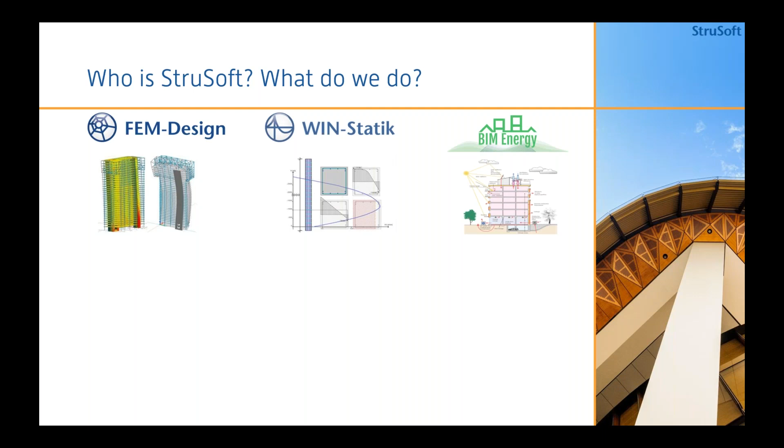And even before that, I would like to make a small introduction about Strusoft and who we are and what we do, even though today we will focus on FEM-Design.

We develop and distribute several software products: WIN-Statik for individual element calculation and design, including frames; BIM Energy for energy calculation and optimization in buildings; Impact Precast and Impact Reinforcement for factories which produce prefabricated concrete elements; and Prestress for pre-stressed concrete element calculation and design.

We are a leading distributor and software developer in Scandinavia for structural design software. You can see here a rendition of our users across Europe, Northern Africa, and a little bit of Asia. There are a lot of users in Scandinavia and the Nordic countries, where we are a leading software provider, and we also have users across Europe, in the UK, and around Central and Southern Europe.

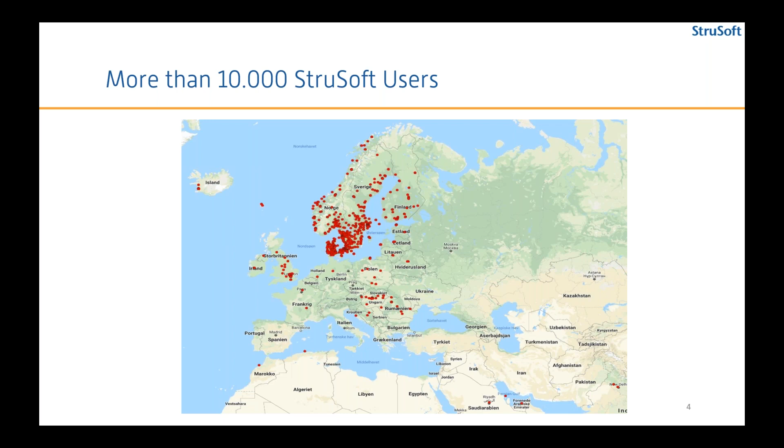We have offices around the world. Our headquarters is in Sweden, where we have 3 offices. We also have 3 offices in Denmark, our most recent office in Finland, and branches in Romania, Hungary, and in Asia, in the Philippines and India.

Let's talk a little bit about FEM-Design, our focus for today. FEM-Design is our 3D finite element method software for modeling, calculation, and design of structural elements. You can do a lot in FEM-Design.

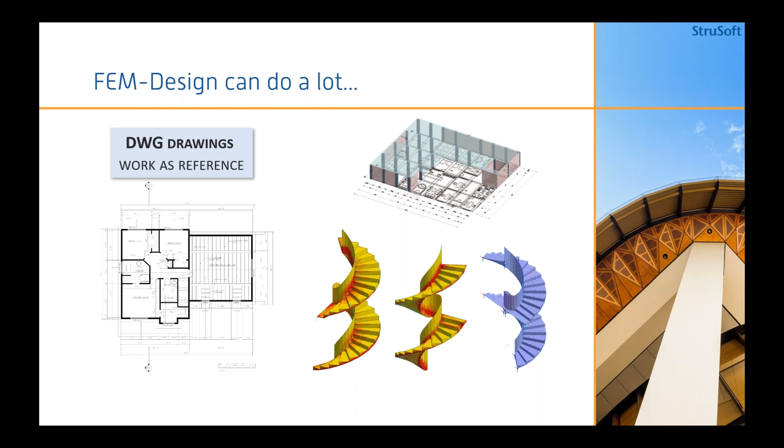I will present a few major topics today. You can model any type of shape really in FEM-Design. You can import DWG drawings and start building from the ground up. You can also import 3D drawings and start modeling as shells, and calculate stresses in those shells and deformations.

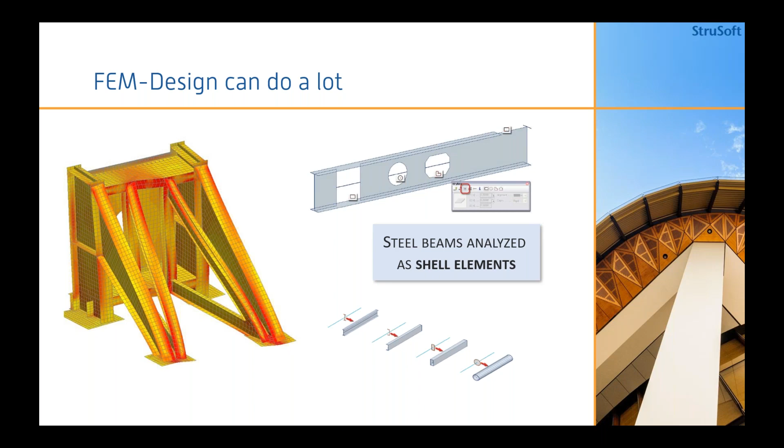As I said, you can basically model any type of shape and structure in FEM-Design and calculate the stresses in those shells.

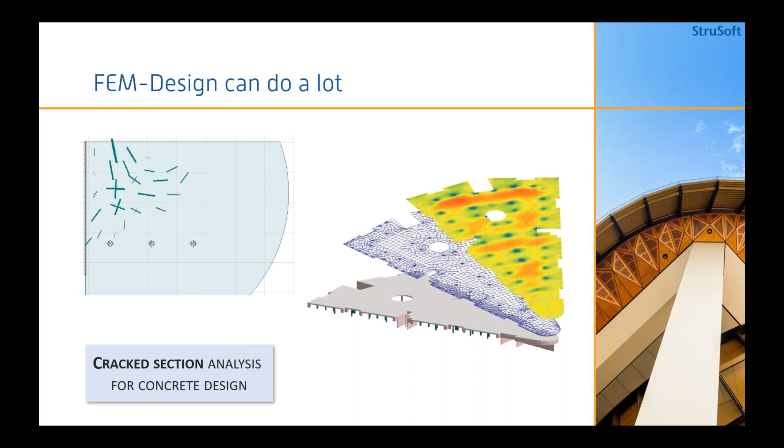A very powerful tool is the cracked section analysis for concrete design. You can calculate a concrete slab with reinforcement in it and study the long-term effects like cracks. You can perform a cracked section analysis and investigate the cracks in an iterative procedure. Once the crack is located, the stiffness is reduced, and then the loading continues until the next crack, and so on and so forth.

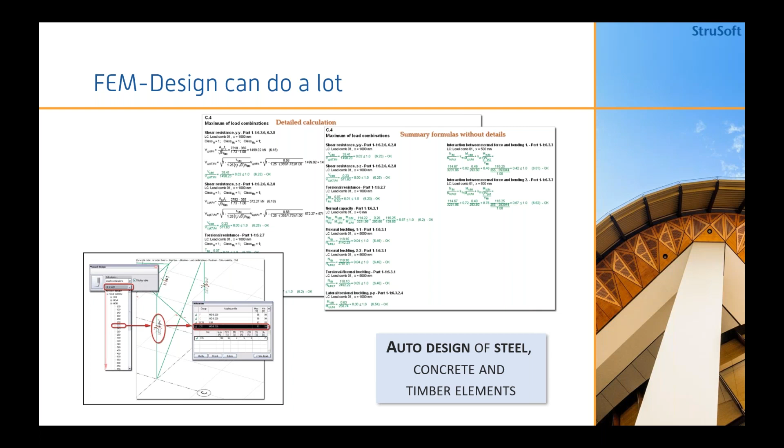FEM-Design has design modules. One of these is the steel design module. You can perform a detailed calculation and verification according to Eurocode on steel elements and get a detailed report with the calculations, ready to be printed and added to the documentation.

Concrete design allows for design of concrete beams and concrete slabs. You can also obtain a detailed report of the calculations and the reinforcement design in beams and slabs.

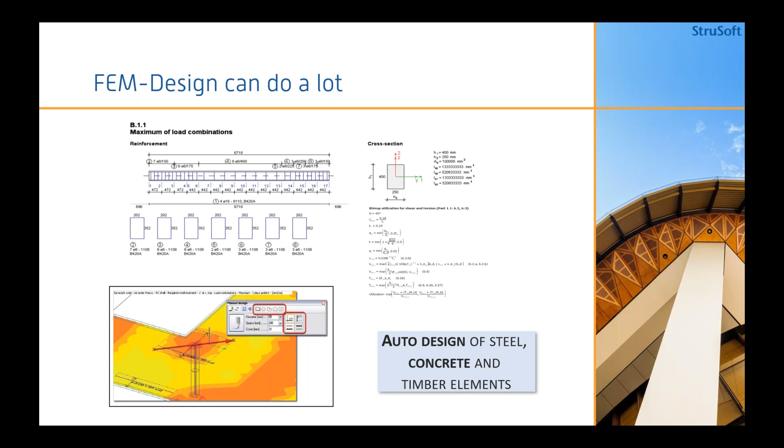And there is also a timber module, which we will actually talk about a bit more today. Similarly to concrete and steel, you can obtain a detailed calculation and verification and perform a design on your timber elements, including CLT panels. We will talk a little more about that in a second.

FEM-Design also includes a 3D soil module. This is an advanced 3D finite element model, and you can study the deformation and the forces in these 3D elements, which is a more accurate representation of the behavior of the soil, as opposed to a spring model and a bedding modulus. You get a much more realistic picture of the soil's behavior, and basically we can model starting from the soil, the infrastructure, and the superstructure all in one model. That is the power of this 3D soil module.

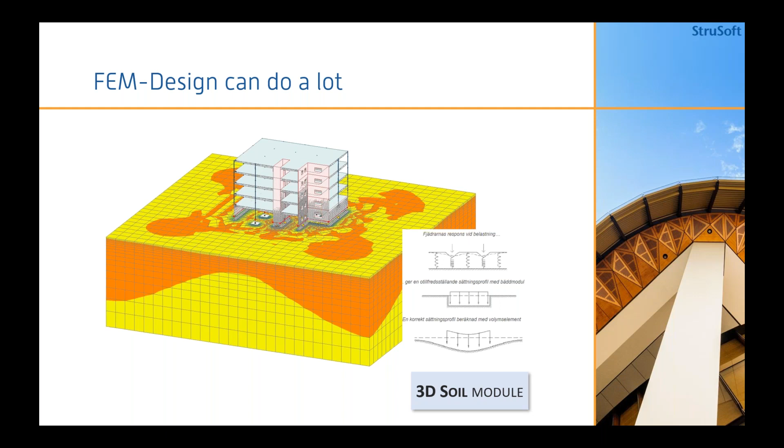I gave you an overview of what you can do in FEM-Design. Of course, there's a lot more, but right now let's jump into our main topic of today, which is the timber module. For that, I will hand over the presentation to my colleague, Stoyan.

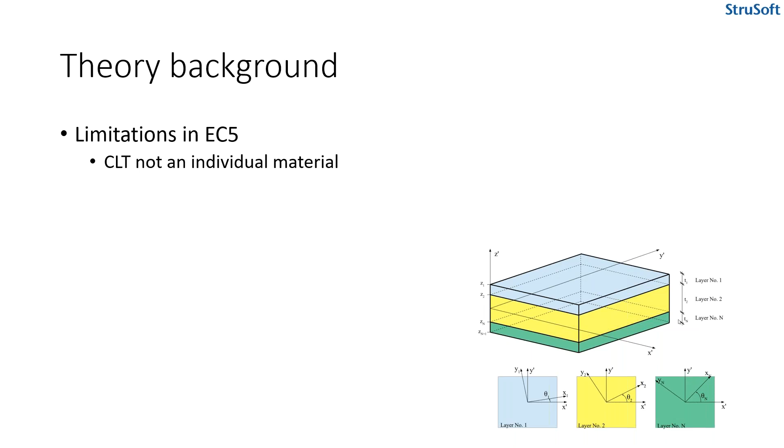So let's start with the theory. The reason we need to talk about theory is that there are some limitations in Eurocode 5. Mainly, CLT is not an individual material yet, so we need to take some other steps to calculate it. Also, Eurocode suggests beam theory, which would be too simplified for FEM Design, because we'd like to use arbitrary shapes, not only the beam shape element. There are some other methods available in some handbooks, but most of them are either too limited or too simplified to be used in FEM Design.

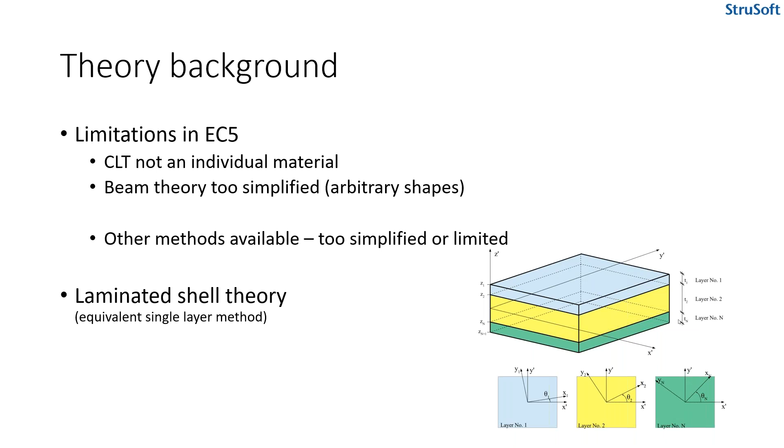So we need to figure out how to go around this problem and implement something new or different, and we chose the laminated shell theory. It's also called the equivalent single layer method in some literature, so if you see that name, it's the same thing. It's useful in general to check the deformations and stress distribution layer by layer in a composite shell, and that's exactly what CLT is, a composite element. The advantage of this method is that with slightly longer calculation time for the element stiffness matrix using the homogenization procedure, the same number of equations remain in the final structural equation system, regardless of the number of layers. So even with really strange shapes with thousands of layers, the final equation system for the whole structure will still have the same number of equations, which saves a little time in the end.

Another advantage is that we can model arbitrary geometry, as I said before. We can also take into consideration different boundary conditions. We can make the whole structure with shells and bar elements, because the degrees of freedom of the CLT are compatible with the other elements in FEM Design. So you can use everything in the same model—you don't have to break it down into a separate CLT model and then a beam and regular orthotropic plate model.

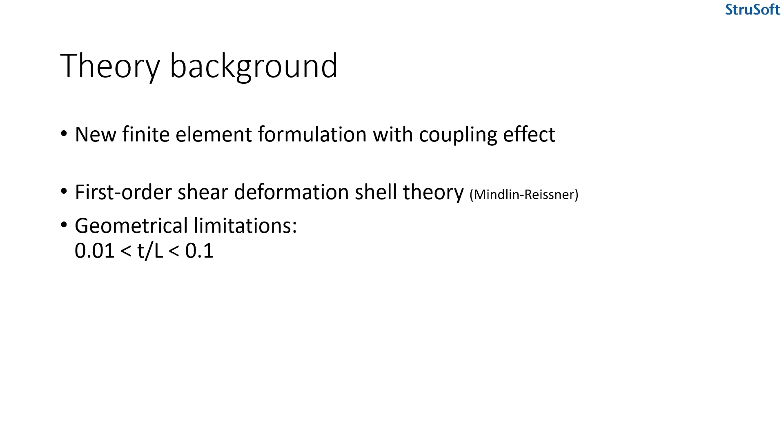Okay, let's move on. In CLT, it's mostly the rolling shear that we need to consider and keep in mind. Also, we should think about the geometrical limitations of the panels. We've suggested a geometrical limitation of 1 to 10% of the length of the element—so the thickness of the panel should be 1 to 10% of the length. This isn't a critical limit, more a good rule of thumb. Even if you're a little below or above, it's no problem, but try to aim in the middle.

This is the well-known formulation of the stiffness matrix, force vector, and strain vector. On the left side we have the force vector with the bending moments, normal forces, and shear forces. In the middle, we have the stiffness matrix with the bending stiffness, membrane stiffness, and shear stiffness. On the right-hand side, we have the strain vector with the curvatures, mid-plane strains, and shear strains.

But the special part of this formulation is that we've now included the B parts, which are the coupling effect parts. For the regular orthotropic plate, we don't have those parts, so they're zero. But for the CLT panel, we implemented this new formulation, so we need this coupling effect here—that's what makes the formulation special. The stiffness matrix itself is the same size as all the other elements, so as I said before, the laminated shells are totally compatible with other elements in FEM Design.

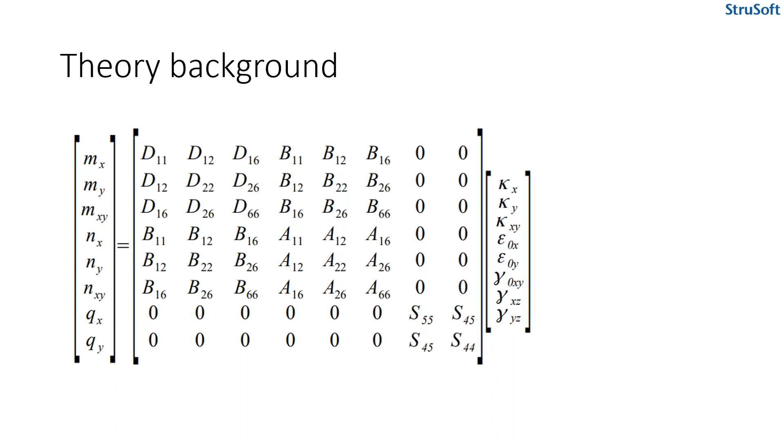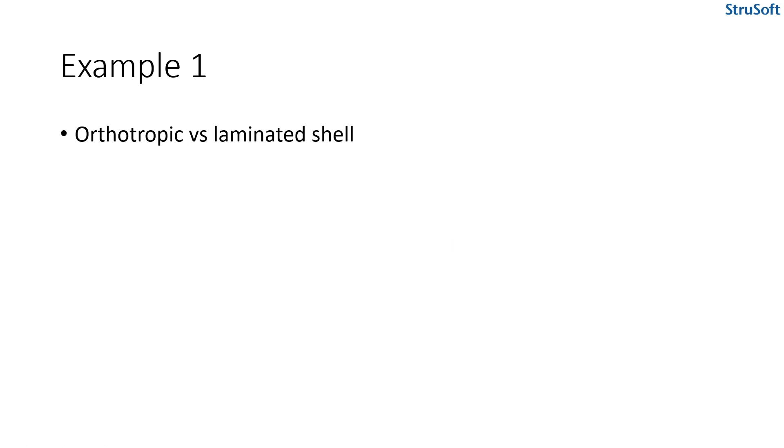Let's see the first example. It's orthotropic versus laminated shell, a little fight between those two. Let's see how they handle in FEM-design.

I have modeled two different files. This one is for the orthotropic plates. Let's see the parameters first, or properties first.

I just selected a random orthotropic shell. You can see from the drop-down list that it's orthotropic shell, just a random type. I actually made it myself to be more similar to the CLT panels regarding the stiffness.

For stiffness, we have a new button down there. You can see the stiffness of that element. You will see all the parts of the same stiffness matrix, so you will see the D part here. If I'm looking back at the slide, the D part, upper left-hand side, and also the A part of the membrane stiffness and the shear stiffness.

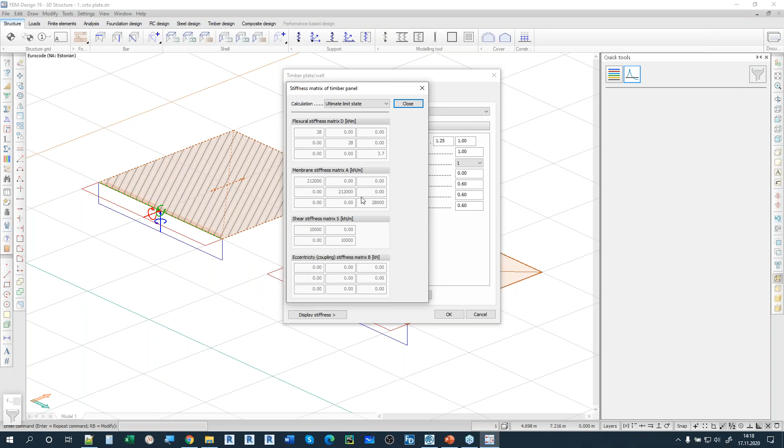And you can even see the B part, or the new coupling effect, but you can see it's all 0, because for the orthotropic shells, this must be 0. There is no coupling effect in orthotropic plates.

And if we load those plates with a force, in-plane force, then you can imagine what we get. Of course, we get in-plane deformation. It's quite usual and expected. Nothing special here.

I modeled two plates because they have the different grain direction, but it doesn't matter much in my scenario.

But if we are looking at CLT, let's open up the other one. Yep, the CLT plates. They are now cross-laminated timber, not orthotropic shell anymore. And again, I defined just a random one.

I will show the details later, but just for now, you can see the stiffness matrix as well with all the parts. But now you can see that the coupling part has actually some values in it, so it's not 0 anymore. So there must be some coupling effect going on.

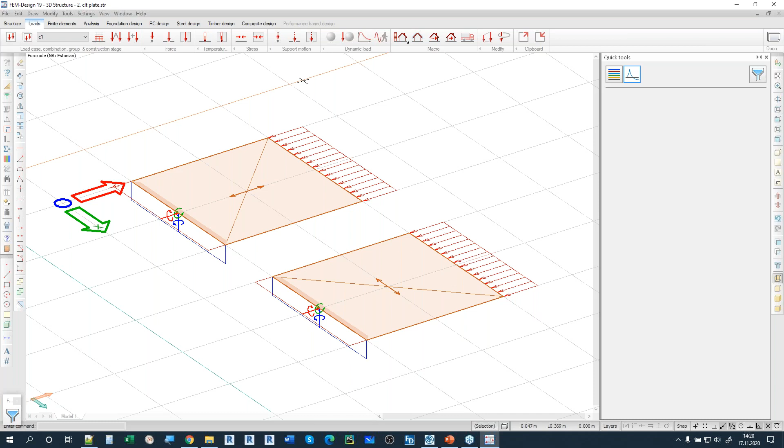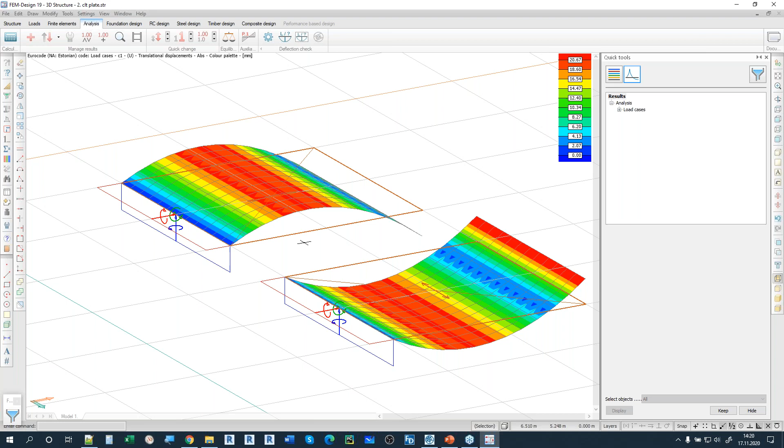Regarding the structure or the properties of the element, we can see what we have, what we can change. You either modify the existing ones or create new ones. I will just modify it just to show you.

We have this new dialog consisting of all the layers of the CLT. Right now I have this only 2-layer CLT, but you can add as much layers as you need. Just click on the empty space and you can select the material for that layer. So it's the regular Timber library that we have inside FEM-Design.

You can change the thickness, of course, for each layer. Let's say I want to make it really thick, the first layer, and the lower layer is still thin. If I hover over the picture with the mouse, I can see that in the upper part in the chart or in the graph or spreadsheet, it will highlight the line with the yellow color, so you can easily identify which layer it is that you are looking at right now.

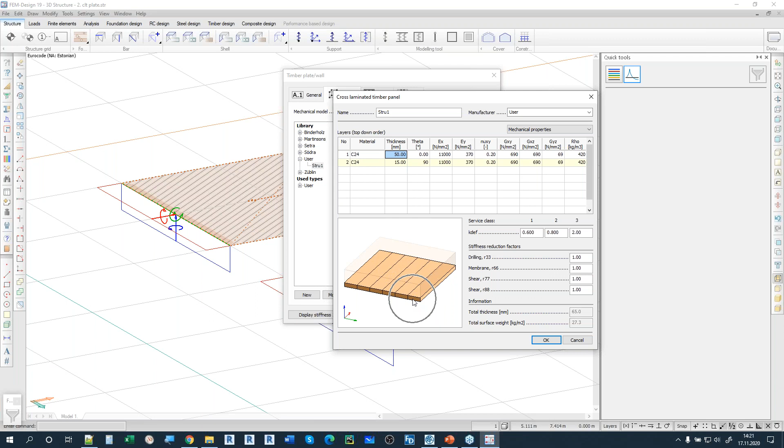And of course, you can change other parameters like the angle of the elements. So it's up to you what you want to use.

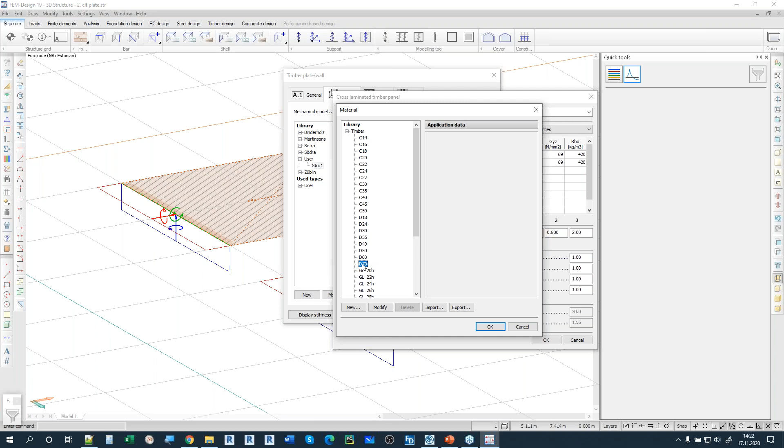And you can of course fill in all the values here as well, all the Young's modules and other parts. But if you're adding a new layer, I'm just randomly selecting something from the list, it will actually automatically fill it in for you. So it will take the same data that is in the database and just fill it in.

Of course, you can manually change it if you want to change something, like you can just modify that value and you're good to go. And deleting is just selecting the element and pressing the delete button. So it's really simple.

Also, you have the service class deformation factors here for each of the service classes. So you can change those if you like. I'm just going to show you what happens if I'm changing them. And you have stiffness reduction factors as well. Those are the factors that you get from the manufacturer, for example.

So if you are looking at the values here, the R33, it is the same value.

Let me see, just a second. Yeah, I closed the picture.

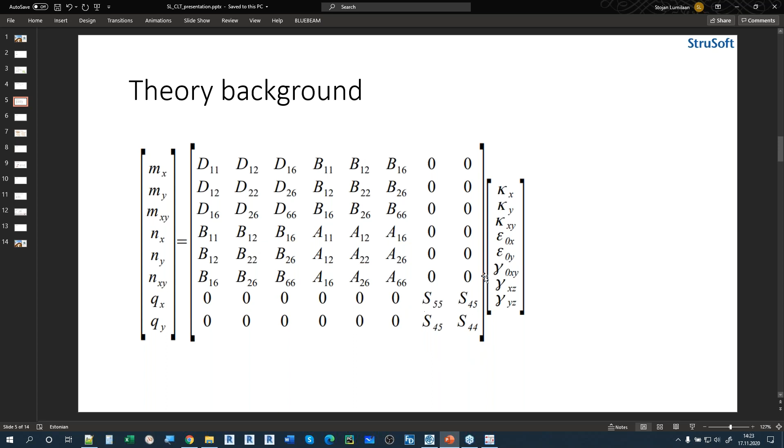Unfortunately, I'm not going to search for it, but it will affect the stiffness matrix. It's actually a factor right in front of those values. You can take a deep in-depth look if you check the manual, where everything is written down regarding all the references to where it comes from. But you can reduce the stiffness basically using those factors. So they are just the reduction factors.

Also some information down here, the total thickness of the plate, which isn't updated yet because it's not supposed to be 45 since I changed it back, but it will update as soon as I press OK. So you will get the right values here, and also the total surface mass or weight.

Okay. Another part you would like to see is that we actually have the limit stresses here as well, not only the mechanical properties. So for each layer, you can see all of those strengths, material strengths. And I actually have also a picture here just to help you out if you don't remember, or just to follow this example.

We have all of those values that are listed here on this picture shown. So if you just take one plank out of this CLT, out of this one layer, you have those bending strengths, perpendicular and along the grain. You also have the tensile strength, perpendicular and again along the grain. You have the compression strength the same way.

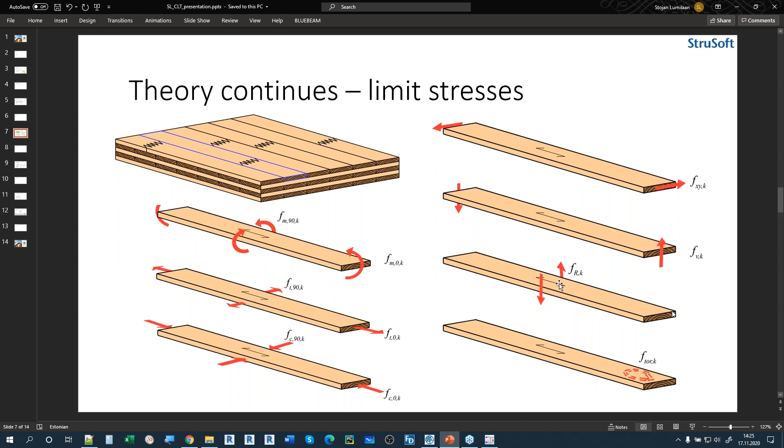Then you have the in-plane shear strength, transverse shear strength. Then you have the rolling shear, which is special for the CLT. And you also have torsional strength at the load contact surface. So it's all of those values that you can change or modify for the element. You have them also in FEM-Design, so you can change whichever you like.

But for now, I just accept those properties as they are. Press OK. It's just a notification.

I have two different materials now because I changed some parameters, mainly the kdef values. But if you are looking at the kdef values now, I can select the service class and it will automatically update the kdef for each one of the serviceability limit states. But I can, of course, manually change them as well if I so choose, so I can place something different here as well.

Of course, the regular factors, the material safety factor gamma M, and system factor K sys, they are all here. The K sys could actually remain 1 because it's mainly necessary for beam theory, but we are not using beam theory, so it doesn't affect us. We can just keep it 1.

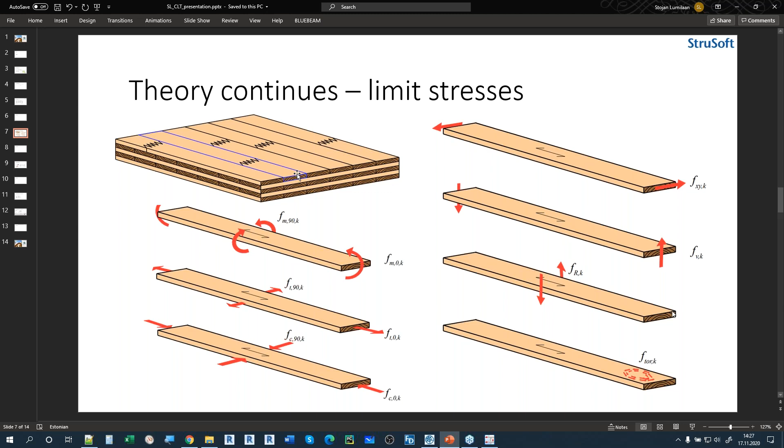Also, of course, some other options down here to consider the shear coupling between layers. If we turn that off, we basically have just a few plates on top of each other, not glued together. And we can also exclude the glue at the narrow sides, so we can exclude the glue that is between the planks in the same layer. All of those, of course, affect our end results.

Okay, let's see. Let's see some results as well. Let's look at the stresses, and then we will look at this design as well, but I will just open up another example.

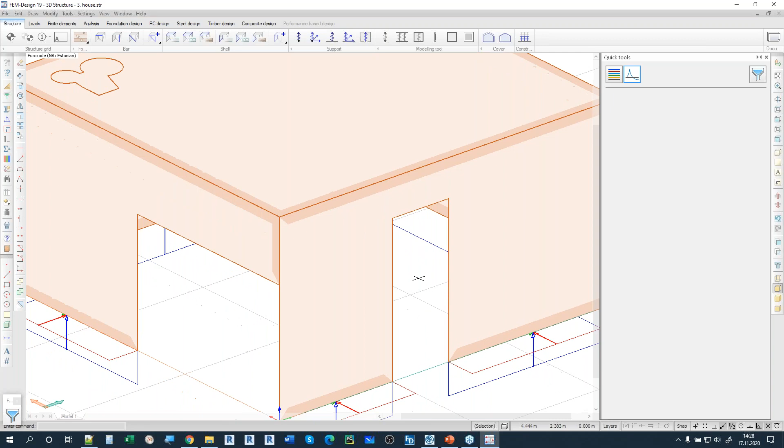Just a quick one. Okay, here it is. It's just a random structure, but I wanted to make an arbitrary shape, so I made this Mickey Mouse picture here in the corner, just to show it's possible to calculate like this. FEM-Design doesn't mind. Also for the walls, we included holes. So arbitrary shapes can be defined and can be calculated and, of course, designed as well.

But let's look at the results first. I wanted to show you the maximum stresses, or the maximum results, maximum of load combinations. Right now, we actually have quite a few load combinations, 8 combinations in total. And we can see the maximum of all of those if we are just looking at the results and maximum of load combinations.

And then let's look at the stresses, laminated shell stresses. It doesn't matter which one I take because I will go into the detailed view anyway, so you will see it in greater detail than just a colorful picture here. But I will just select the upper one, display it with the color palette, maybe it's visually more pleasing. And then I will select the detailed result. In the detailed result, we can either select one point or select the whole laminated shell. So we have different options, but let's just go with the point at first.

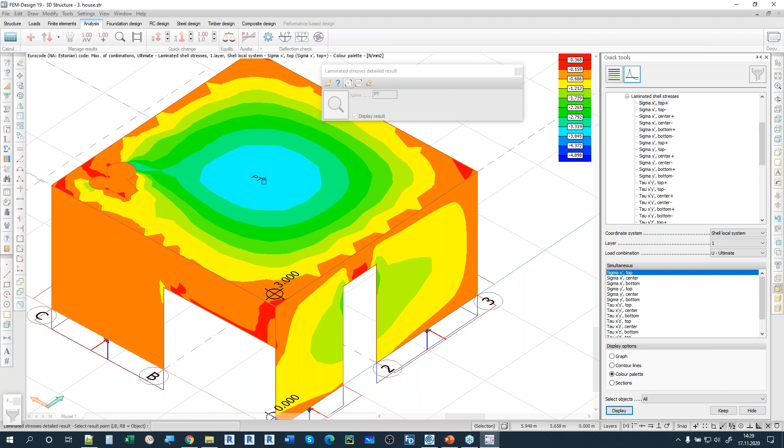Okay, I selected, actually had a point. I will show you again. Actually have a point right in the middle, so I selected the same point.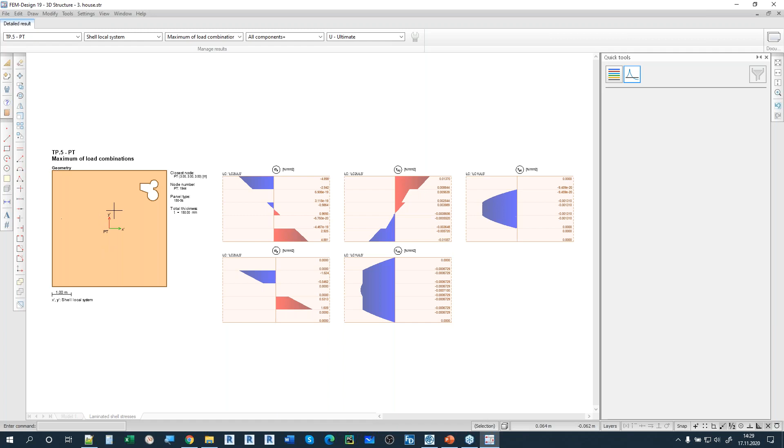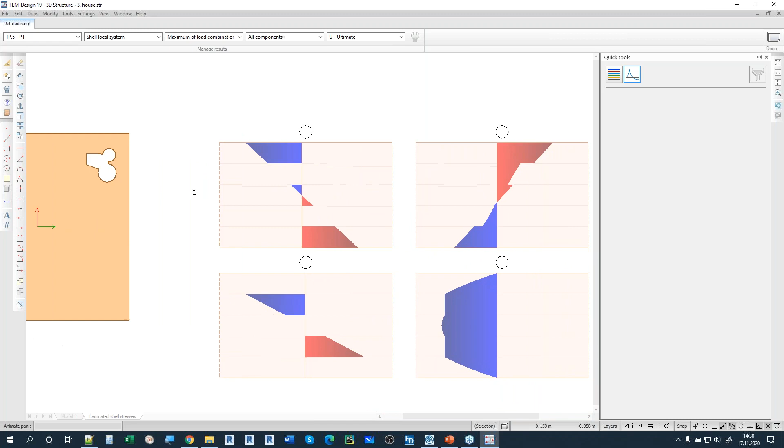Okay, here you can see a quick view of the plate, also with my Mickey Mouse cutout. So that's really nice. You will see where the point actually is, the PT. The PT is actually the closest finite element node. You can see the information here, also a little bit of information about the panel itself, and then you will see those stress results.

Right now I'm actually looking at the all components plus function. So what it means is that for that point we selected, it will show me which load combination produced the maximum sigma x, which load combination produced the maximum sigma y, which produced tau xy, and so on.

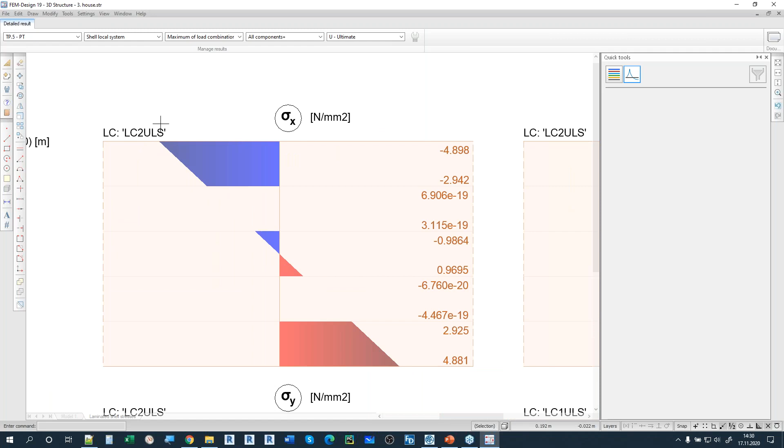We can see it right here. If you're looking closely, this is from load combination 2, this is also from load combination 2. But for example tau xz is from load combination 1, so it's not coming from the same load combination. And this one is also from the first load combination. So different load combinations produce different results in that point across all the layers that we had. We have 5 layers at the moment.

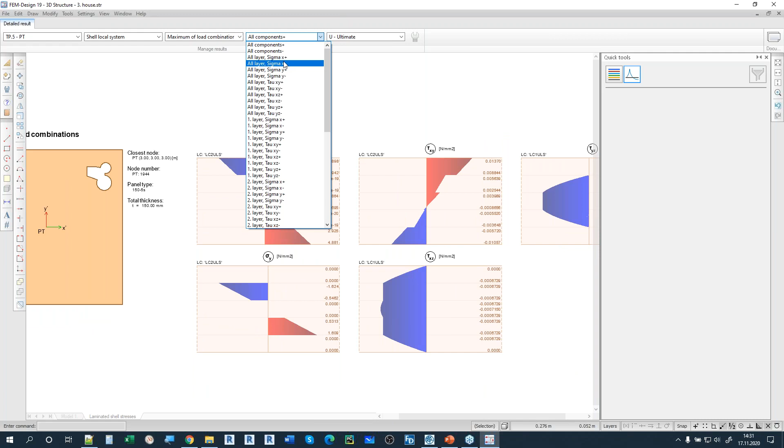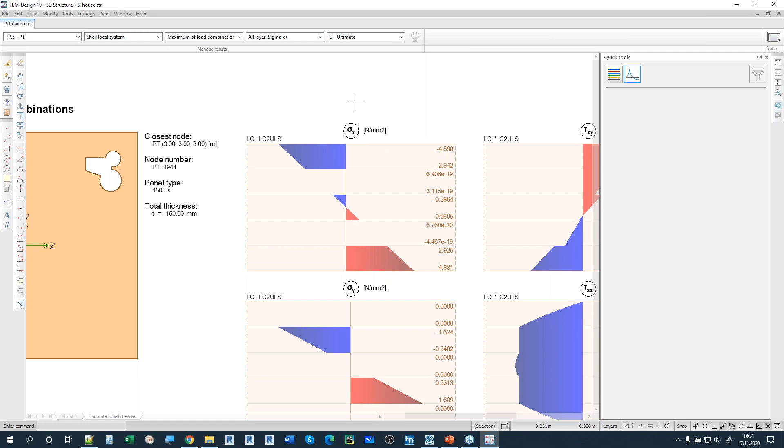But you have different options here as well. For example, you can select all layers sigma x. What this does is find out where the maximum sigma x is and in which load combination, across all the layers. Then it will show us the results of the same load combination for the other stresses as well. So now everything belongs to load combination 2.

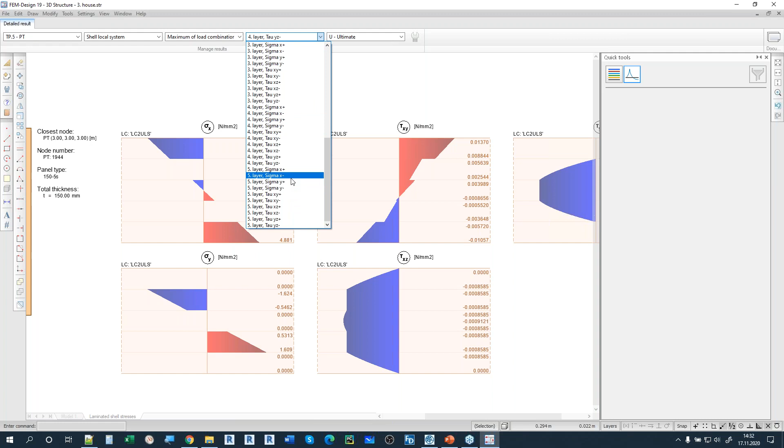There is even a third group, which is a layer by layer approach. So we can, for example, select layer 4 and see which load combination produces the maximum sigma y minus. Right now it's pretty boring because it's the same load combination. Let's see, maybe we have something different. It's load combination 2 or 1, it's either one of those two. So we don't have many combinations here for the ultimate limit state.

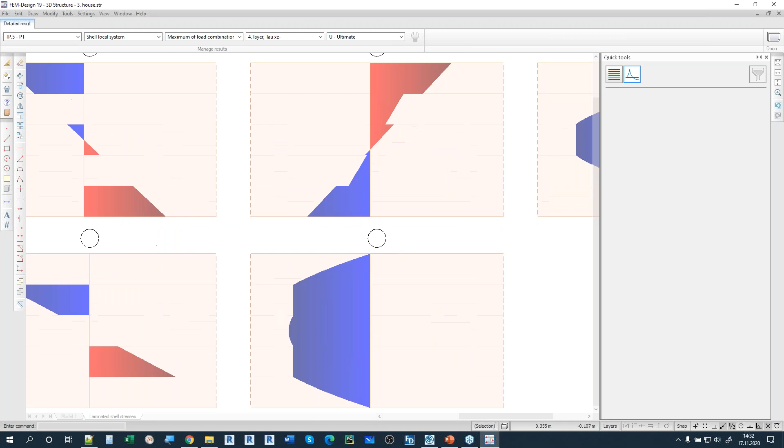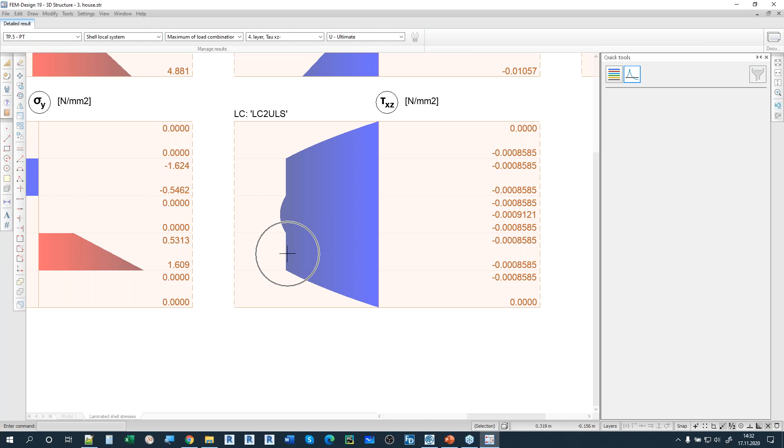Anyway, layer tau xz minus. So if we are looking at the xz layer 4, the fourth layer is right here. It's a little bit hard to see on the screen, but you can follow it up if you want. It will just take the minimum tau xz, select the load combination, and show the results of that same load combination for each of the stresses in that specific point.

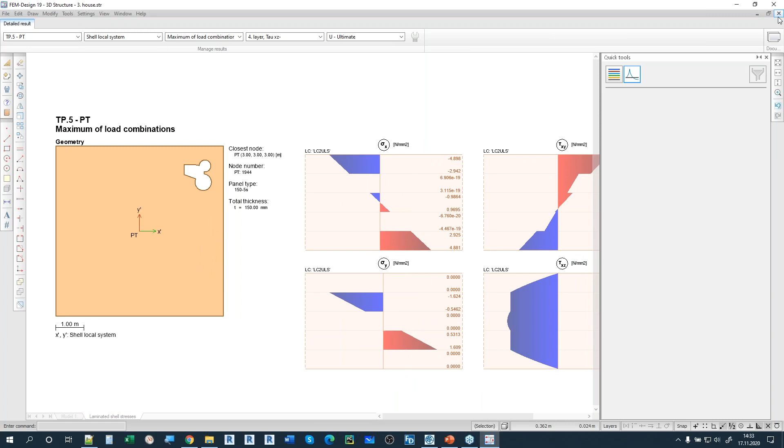But we have something else as well. We can look at the maximum of all of the points if we select the second option here. So we don't select one point, we select the whole plate, and it will produce some relevant points on that plate. Right now it selected 5 different points, and we can select the same kind of results. For example, all components plus will tell me that sigma x comes from load case 2 from point 1, sigma y comes from load case 2 but from point 2, and so on.

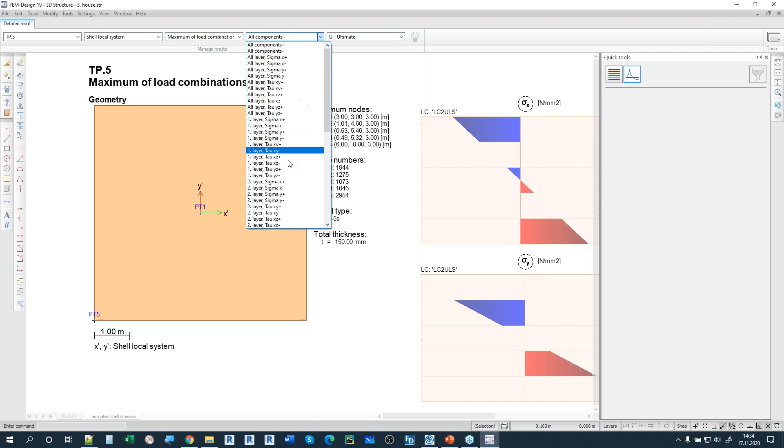So each one can be from a different point, each one can be from the same point. You have many different options for how you would like to present the results and use them for the design or just checking. Here we have the same options: we can select all components, which might be different for each layer or each load combination, or layers, or just one layer, whichever we want. This is a pretty nice way to see the results - it's quick and easy and a really good overview.

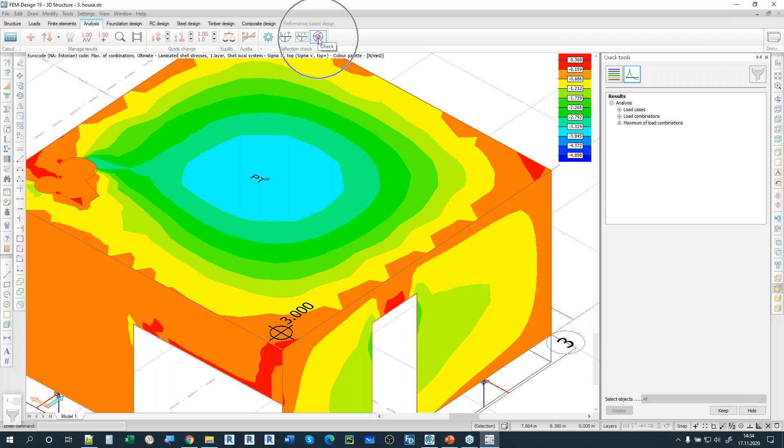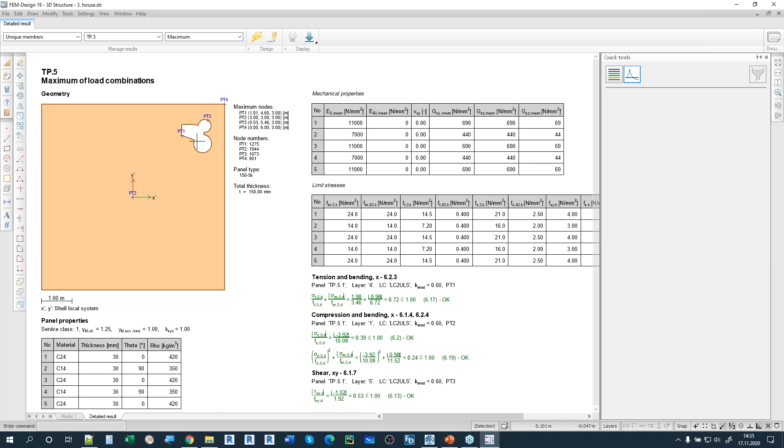The utilization for the highest one is 72%, mainly because of the Mickey Mouse here in the corner. But for this wall, it's of course much lower. If you want to see more detailed results, we can just query it using the magnifying glass as usual. Now we don't have to specify a specific point, we can just select the whole plate. It will again generate those interesting points and show us some panel properties here, which is really nice and tidy.

And then, of course, comes the design checks that we have been looking for. Here you can see the Eurocode reference. It's Eurocode 5 and chapter 6.2.3, so you can follow it up if it's correct or not, if you want to hand calculate it as well.

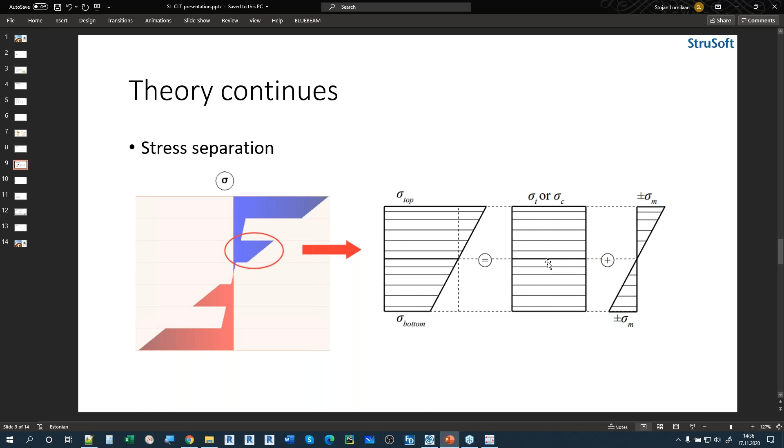But for many of those checks, we actually need to separate the sigma for normal stress and the bending stress. So this is why this picture was here in the presentation - this is how we do it. We separate the sigma that we get from the analysis into the bending part on the right-hand side, and the compression or tensile part. So after the separation, we can use the same formulas that we have in Eurocode.

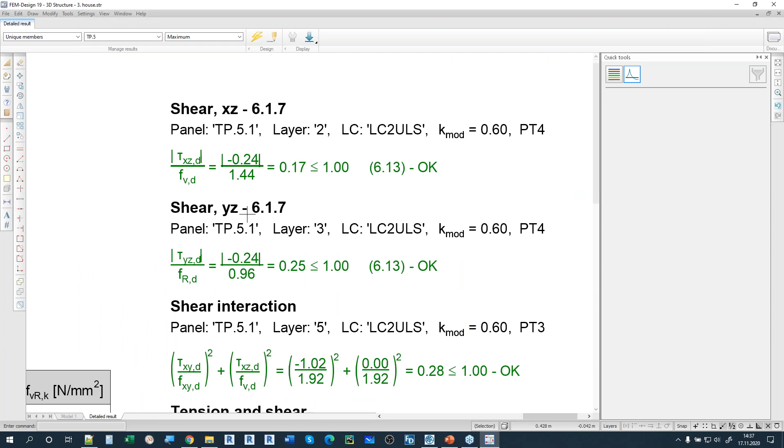And it's the regular Eurocode checks: tension and bending, compression and bending, shear XY, shear XZ, and also shear YZ. So those are all Eurocode checks, you can see from the reference.

But at the bottom here, you actually see that there are some calculations that don't have any reference. Those are because we have extended the checks - we don't rely only on the Eurocode checks, we have added some additional ones. They are totally optional, so you can actually turn them off if you don't want to use them. But here are some conservative checks.

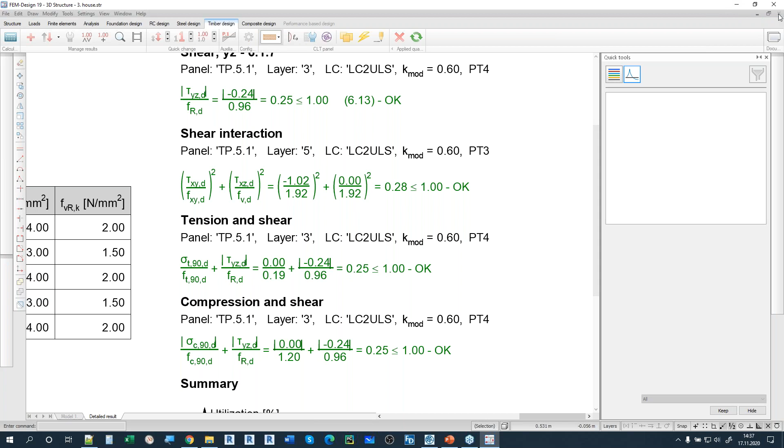If you want to turn them off, you can use this wrench icon, select the element, and just uncheck the shear interaction formulas. So if you turn it off, for example, let's do that, and I will check the plate again and go to the detailed results. Then you will see that after the shear part, there is nothing - there are no checks anymore. So you can just turn them off if you don't like to use them, or turn them back on using the wrench icon again. Really a very simple and easy way to do it.

Just about those checks, let's see if I can show them here as well. Yep, I selected the wall now. So we have some more checks, but those 3 are here still.

So the first one is checking the resultant shear stress in grain direction. The second one is relevant if there are rolling shear and tensile normal stress perpendicular to grain. And the third one here is rolling shear and compressive normal stress.

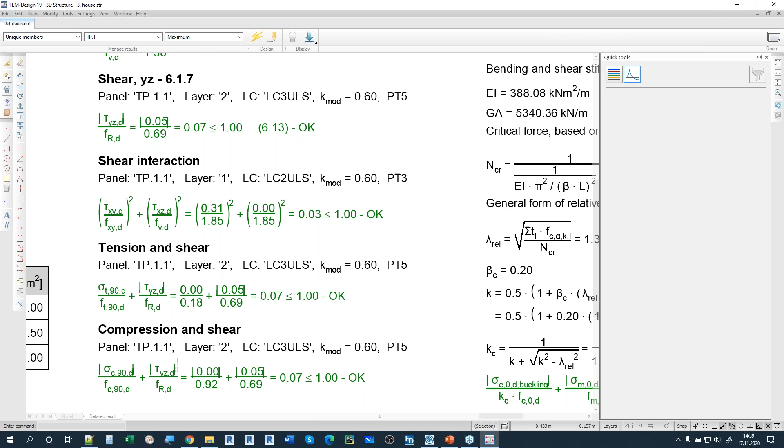Okay, and additionally, you can see that for the walls, you have something called buckling, so we can actually check it as well. It's again not exactly according to Eurocode because there is no obvious buckling check for CLT in Eurocode, and no other software, as we know it, uses this or even offers this functionality. So we might be the only one who does this, but it's again an optional check. You can use it if you want. We followed the basic rules of Eurocode regarding the reduction factors for this to work.

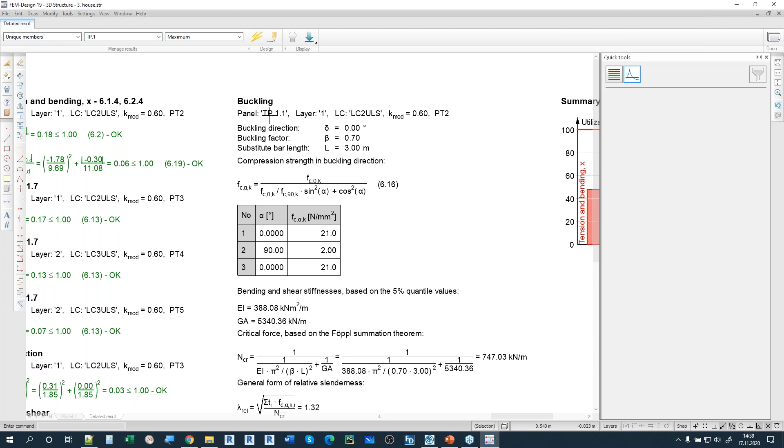I will show you on the slides as well. We basically use this check to check the buckling, and the main idea behind it is that we need to find - or the main problem here is that we need to find - a KC reduction factor. And for this factor, it's the same formula here. To find the KC, we need to solve all of those equations, but it comes down to finding the beta C, and also defining the buckling length beta.

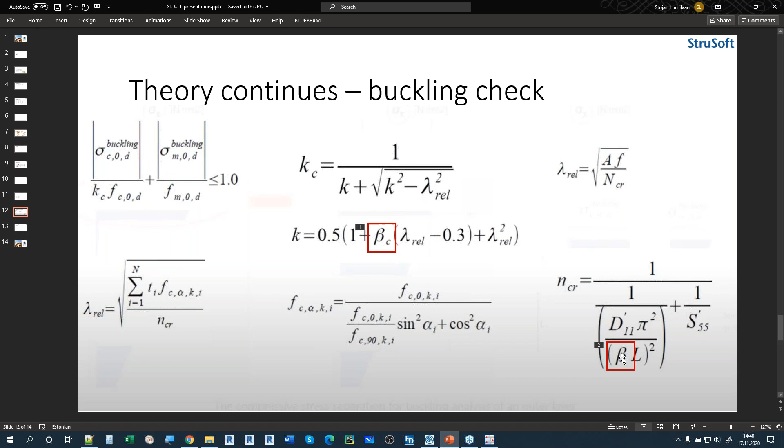In FEM design, we can define all of those using the same wrench icon. If I'm selecting the wall, here I can enter the beta C if I want to. So the 0.2 is like the default value for us. There's no specific value in Eurocode for CLT, so we put 0.2 as a conservative estimate for it.

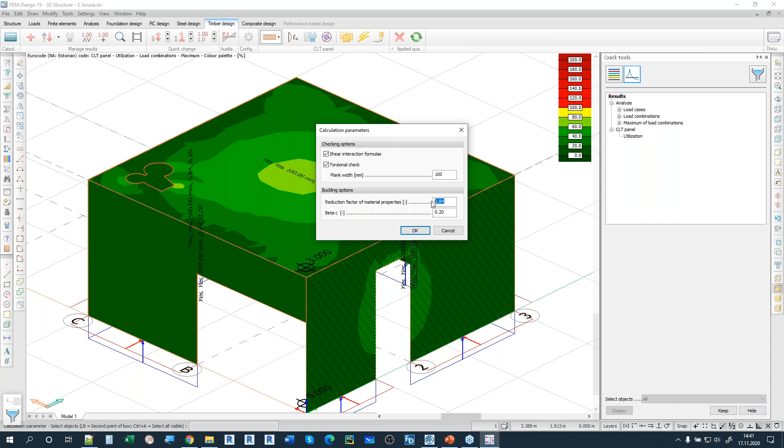Also, if you want to reduce the material properties, you can use the upper one here as well, the reduction factor. And this reduction factor should be between 0.67 and 0.84. We also placed 0.84 here as a default value.

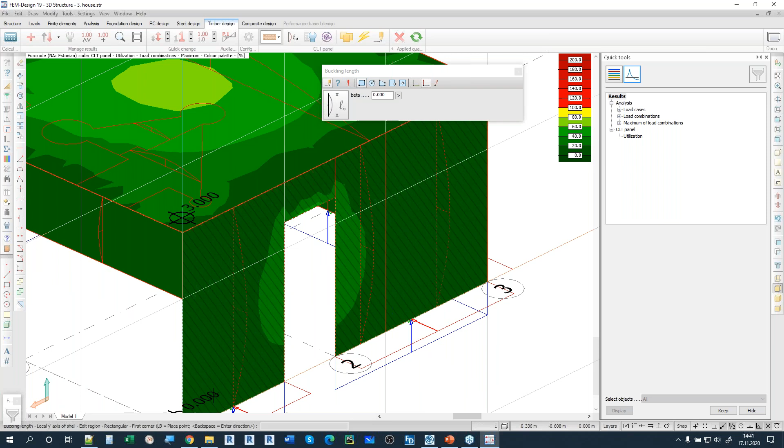To define the buckling length or the buckling direction even, we have the other tool here called buckling length. You're not limited to defining the buckling only in the vertical and horizontal directions - you can actually define the buckling in an arbitrary direction if you want. Nobody tells you that you have to do it, but then you have to, of course, select the user-defined option here, then select the plate. It's a little bit difficult to select the plate if I have that visual style.

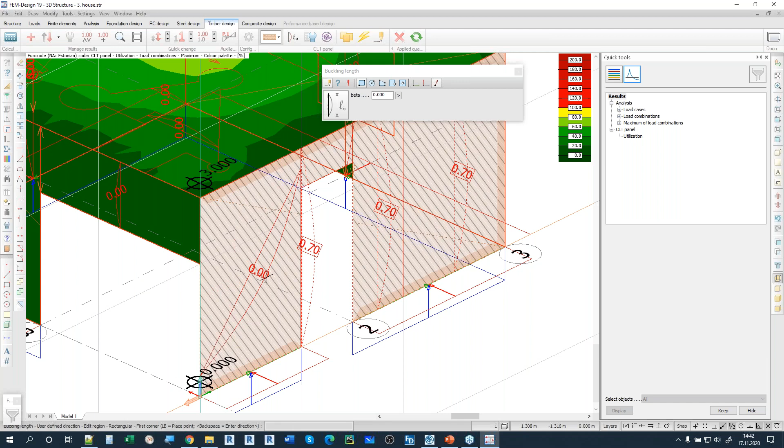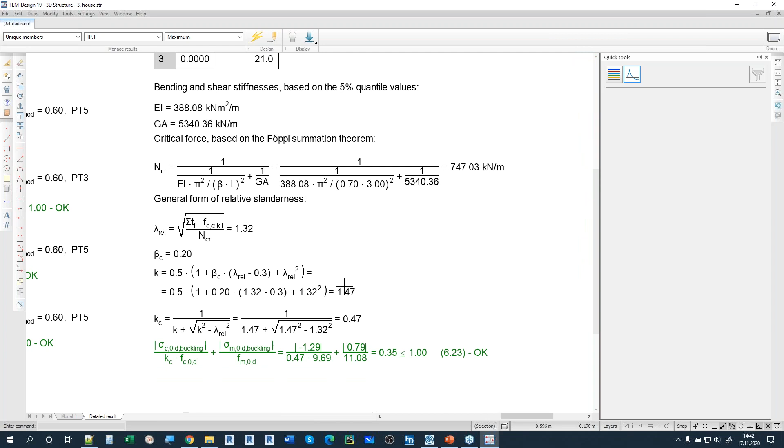But let's say I want to define the buckling in that direction. So now I can do it. Now I have the buckling here, and of course, I should define the buckling length as well. Let's put 0.7 here, for example. And if I calculate it now, or check it, and go to the detailed results and look at the wall, I can see that there is this buckling check now, and yeah, it's following the same rules as I showed on the slide. So we're doing it for each of the layers and getting the end result.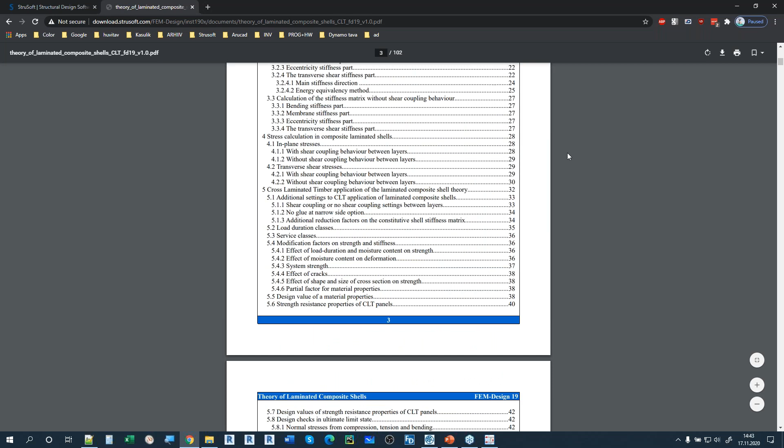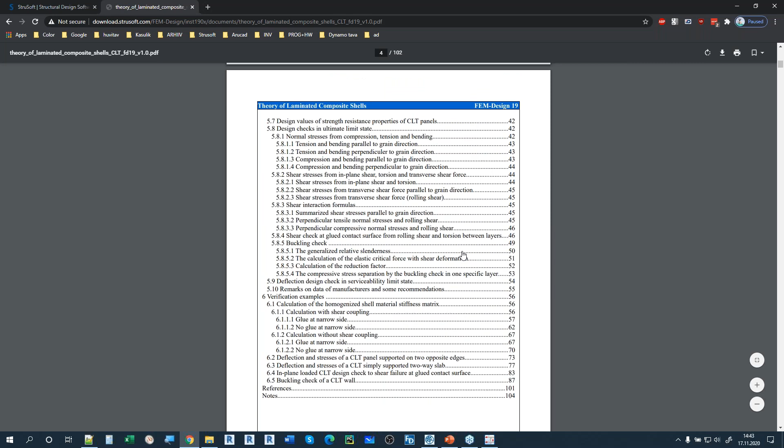Yeah, I think we covered most of it, or the basics of it. If you want to know more, there's always a chance to go to StruSoft's webpage, or just Google Wiki FEM design. There you have our online manual, and other manuals on the left-hand side, where you can choose the cross-laminated composite shell theory and study it. There are references for why this method was selected, what's the background, and also some verification examples. So if you want to follow along, this is a good place to start.

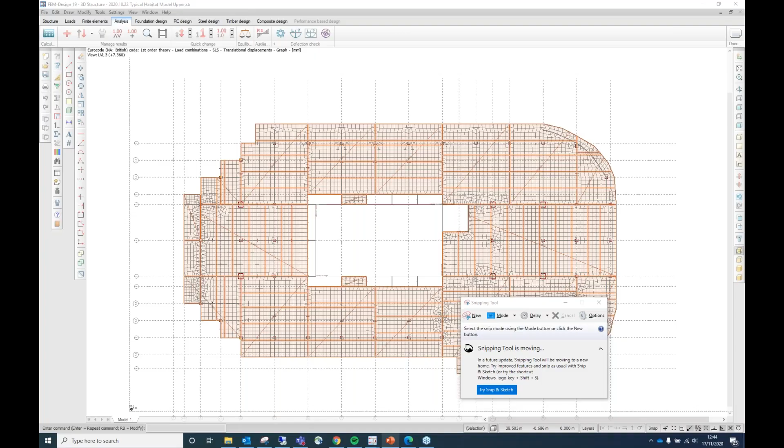Right, so I thank you for listening, and I'll give the word back to Flavio, I guess. Thank you, Stoyan. I'm just going to move and pass on to the microphone to Eloi. Oh, can you hear me? Hi Eloi, yes, right. Can you see my screen as well? Yes, brilliant. I'm also going to turn on my camera so you can put a face against it. Are you seeing my screen or are you seeing my face? We see both. Oh yes, we see both. I've lost control now. Good.

All right, hello everyone, thank you for that in-depth introduction to FEM design. I'm going to talk more about an application of the software and how we've used FEM design to help us get to schematic design of the Atlassian tower, at least for the CLT bits and the Glulam bits.

So the Atlassian project is in Sydney. It's very central, right next to the central station you see on the right-hand side here. It's a 40-story tower with as much timber as you can put in a tower of that height, pretty much. That's the goal expressed by the client, to try and reduce the embodied carbon footprint. And it's also the beginning of a new tech hub in that area of Sydney.

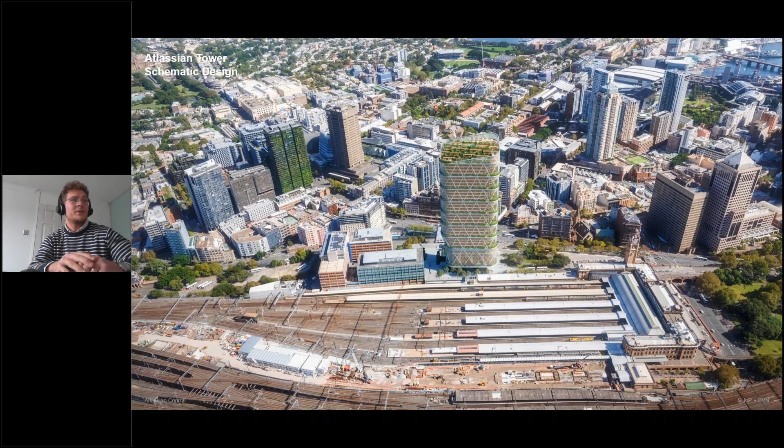Atlassian are keen on being the first ones building a tower, and then as other tech companies come into the area, there's going to be more towers just to the south of it. So this is a fresh start for a new hub in Sydney.

So the client is Atlassian. They are a tech company which is pretty big in Australia, and they're famous for developing software that helps software developers. Not something I've come across before in the past, but certainly a huge company there in Australia. The architects are called SHoP, the lead architects, based in New York, helped by a local company in Sydney called BVN. For the structure, it's us in London, EOC, helped by a company in Sydney called TTW. We've also got a mission to design the facade, done by our San Francisco office, by Lisa and her team.

About the tower: it's about 180 meters from the ground floor. It's not a simple structure at all. It doesn't touch the ground for the most part, but the central core goes to the ground and to the foundation, plus 2 big columns, but the rest is overhanging, if you like. The overall floor area is about 68,000 meters squared, and in this we want to squeeze as much timber as we can. At the moment, we're looking at about 8.3 thousand cubic meters of CLT and 3.5 thousand cubic meters of glulam.

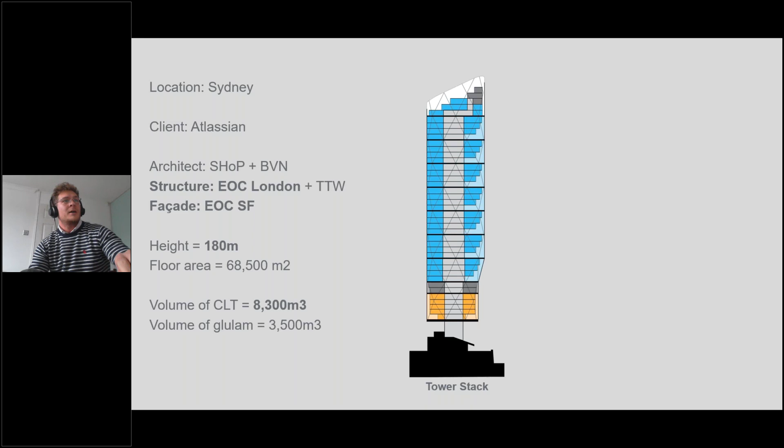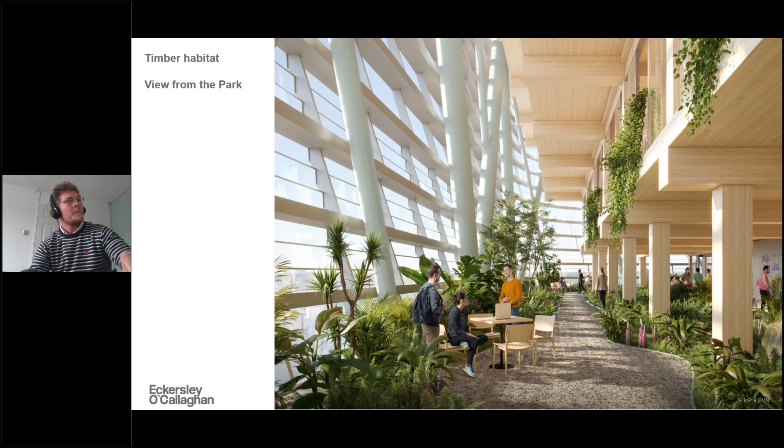This is just a nice visual of the timber habitat seen from standing on the mega floor. As you see, the timber parts are completely detached from the main facade, creating that park space, and the timber overhangs over the park, but it doesn't use the external structure to support it—so it has a series of cantilevers on that side. And that's another rendering from the inside, showing a keen intention to express the timber and expose it as much as possible, having exposed services running through beam penetrations, and exposed CLT soffits and glulam beams and columns.

Just a bit more details on how the structure works. The tower has a central concrete core in the middle, which is what you see on the first line here. All the red elements on that diagram represent what we call the mega frame, or compartmentation floors, as they were previously called, or mega floors. They are the fire breaks. The 3 stories above the fire breaks are made of timber, which is what you see in sort of yellowish on the diagram.

On some areas of the floors we've got large cantilevers, and we couldn't really just use glulam to achieve those cantilevers within a restricted depth. So we had to use some steel hangers, which take some of the load to the mega floor above the top timber floor. Finally, the pink elements forming a diagrid, or exoskeleton, as we call it, are forming the primary structure. They're not really related to the CLT design, but certainly a key inspiration from the architect and a key structural element. I'm not going to talk about these more today.

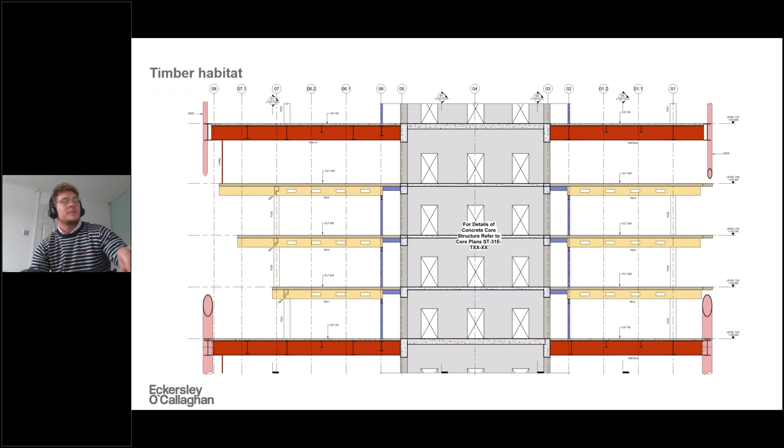We've used FEM Design StruSoft for all of the timber design up until now, and it's been really useful and has allowed us to do checks that we wouldn't be able to do on simple span to depth tables or easy softwares you can find for free online. A lot of things that Stoyan mentioned today have been used.

So certainly having StruSoft as a tool was great, and that's what we've been using from the beginning. It's not a simply supported beam calc, and even for schematic design we had to have some form of finite element analysis.

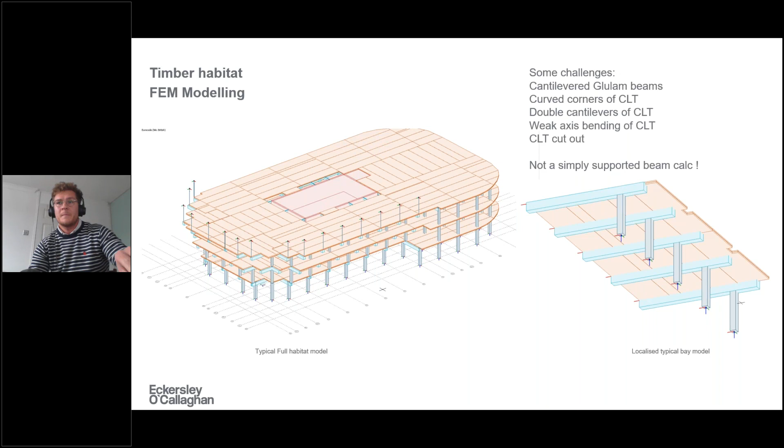Looking a bit more at that sort of localized typical bay model, we've used in our case a standard 200 thick panel of CLT, and that's what we have throughout the tower. But one could be interested in exposing some hardwood lamellas, for example, on the underside, and you could have a different layer, and it's really great to have a tool that allows us to change those layers if we want to, and it doesn't need to be a specific CLT manufacturer. It can be any manufacturer, any properties.

That's not illustrated in this slide, but we are, for example, talking to local Australian suppliers. The market is not huge there, but there are some suppliers, and they're using different species of timber. So while what you see on the screen is typical European spruce for CLT, some of the CLT supplied locally will have different capacities and stiffnesses. It's great that we can integrate this into the same software.

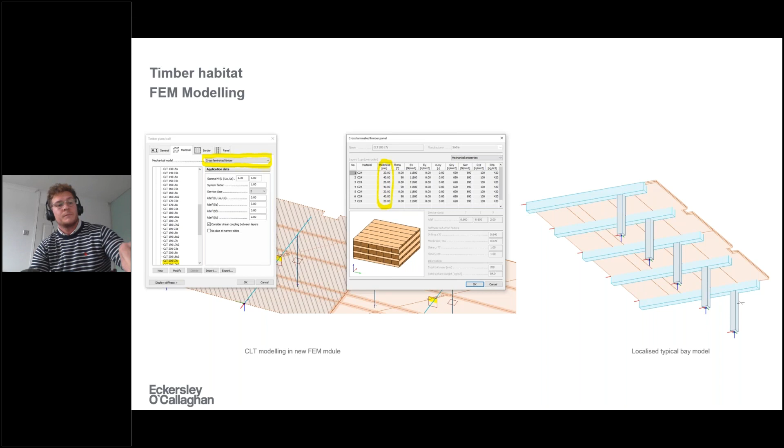After setting up the properties of the panels and the geometry, we've run some analysis like you would do with any analysis software, getting some bending moment diagrams in both directions, which is what you see on the left. Getting some deflection plots, checking in this instance the deflection under a 1 kilonewton point load, which was required for a vibration check. On the bottom right is a mode shape for the first natural frequency, all done in the same software.

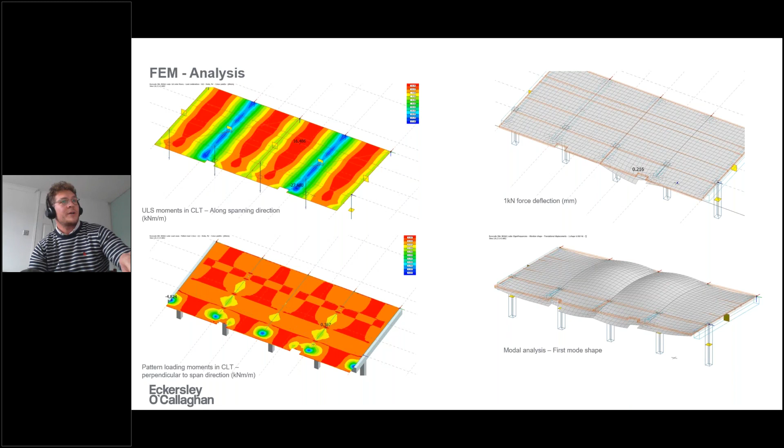I'm not going to go into detail again about these, but it was really quick to check utilization of our panels, and especially the local stresses around those notches. In this case, because the beams don't extend all the way to the edge of the CLT, understanding the peak moments and whether that would fail the CLT panel locally or not.

You see on the left the stresses in the different lamellas of the timber, and on the top right you see utilization, which extends from dark green, close to 0, to almost yellow-greenish, which in this instance was up to 75% utilization. The bottom right image shows all the Eurocode checks that Stoyan presented earlier.

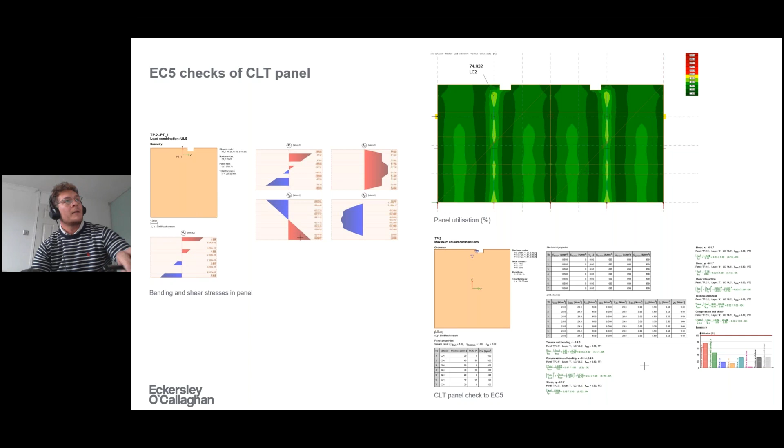And we've also applied this to our larger scale timber habitat model. This diagram shows the process that we've gone through, but one thing that wasn't talked about earlier today was the fact that FEM Design allows a very quick panelization of any panel. So going from the first to the second image on that diagram, in a few clicks, you can define the typical panel width, and it would automatically break down your larger panels into a regular spacing of CLT panels.

This is quite important, actually, when you look at, for example, weak axis bending and cases where your CLT extends further than the support, because the panelization means you've got a cut in your CLT and you don't have a moment continuity suddenly. Sometimes you don't even have a full shear continuity along these interfaces. The panelization is normally something that is done later in the process of the design by the timber manufacturers, because it depends on a lot of site logistics and, more importantly, it depends on transportation.

But we know, for example, in Europe, that panels come typically at 2.4 meters width. It can be slightly larger or sometimes slightly less. So it's good to have an idea from the start and to do that panelization earlier in the design process, at least to get a feel for what could work. And then going around the loop clockwise, we've checked the panel utilization and gone into the detailed calcs from Eurocode 5 to see that everything was okay.

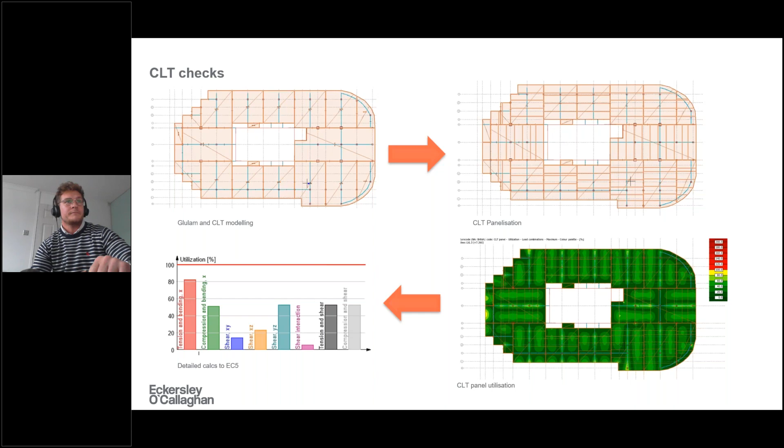And I think that's all I have for today, unless there are any questions.

One thing you may ask is why we've used Eurocode 5, even though the project is in Australia. That's probably an obvious question. The answer is there is certainly some timber industry and a code for Australian design, but it's not very advanced, and it's commonly accepted to use Eurocode 5, which is much more advanced. There's been a lot more research done in Germany, in Austria, and in the rest of Europe, and using Eurocode 5 is acceptable. Also, FEM Design unfortunately doesn't yet do design to Australian standards, so we've had to stick to Eurocode.

How do you feel, Eloi, is this CLT construction industry going? Is there a lot of tendency for more projects using this type of material, or are you working on other projects or have any upcoming projects in CLT or timber?

Yeah, definitely. I think many structural engineering companies are pushing for the use of timber generally, and CLT is an efficient way of using timber for floors. There is definitely a push in the industry for pushing clients to use CLT and timber generally. It's sometimes not necessarily more expensive. There's a better feel, but most importantly, it's got a better carbon footprint, and that should be everyone's target now. So yes, whenever we can, we are advising for CLT, and often it is becoming more and more successful, and we're managing to use CLT on more and more projects. So more to come, for sure.